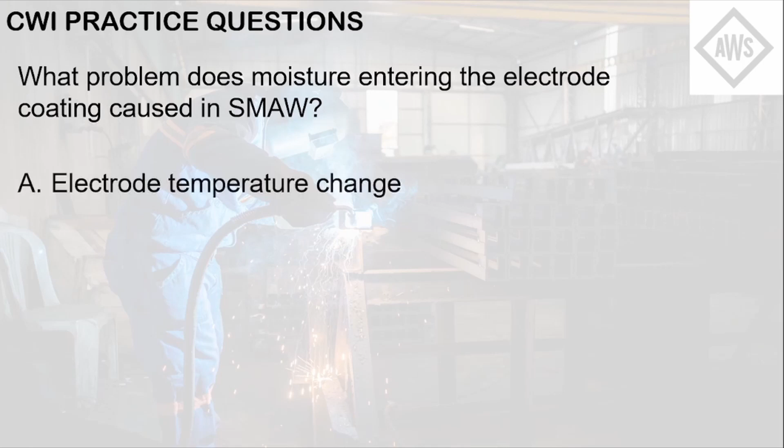Next question. What problem does moisture entering the electrode coating cause in SMAW? Letter A, electrode temperature change. Letter B, short circuits the electrode. Letter C, introduces hydrogen to the weld causing brittleness. Letter D, none of the above.

So when moisture enters the electrode coating, what does it cause during the stick welding process? Does it change the electrode temperature? Does it short circuit the electrode? Short circuiting mainly pertains to GMAW processes. So letter C is the correct answer, because when moisture enters the electrode, basically it's H2O, when it breaks down, hydrogen can cause brittleness to that molten weld pool in the welding process.

So last question. What are the elements of the AWS identification system for SMAW?

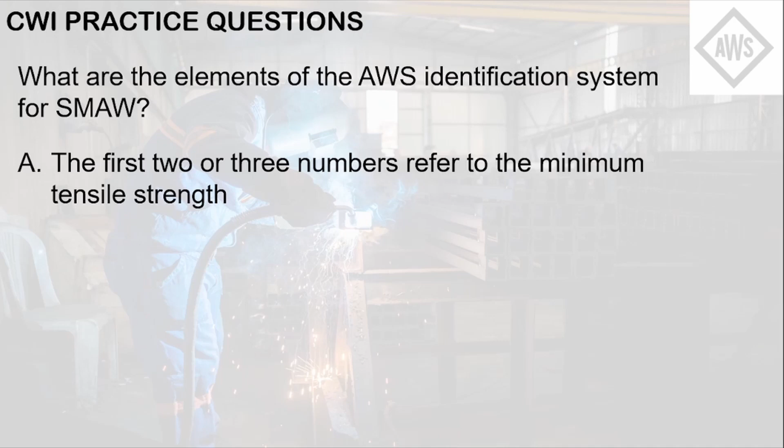Letter A, the first 2 or 3 numbers refers to the minimum tensile strength. Letter B, the next number, second to the last number, refers to the position. Letter C, last number describes other characteristics by the coating present on the electrode. Letter D, all of the above.

So if you check the choices, the first 2 or 3 numbers indeed indicate the minimum tensile strength of the weld. The next number refers to the position, either 1 or 2. The last number is the chemical composition or any other characteristic that describes that electrode. So all of these 3 choices are accurate, so the answer here is letter D.

This welding process is characterized by solid wire electrode which is fed continuously through a welding gun, commonly known as MIG welding. Letter A, FCAW. Letter B, SAW. Letter C, GMAW. Letter D, GTAW.

So FCAW is characterized by a tubular electrode, so definitely that's not the answer. SAW is submerged arc welding, which is an automatic welding process. GTAW is a welding process which consists of a filler metal or a filler rod with a tungsten electrode to heat and weld the metal. So that leaves us the answer, letter C, GMAW.

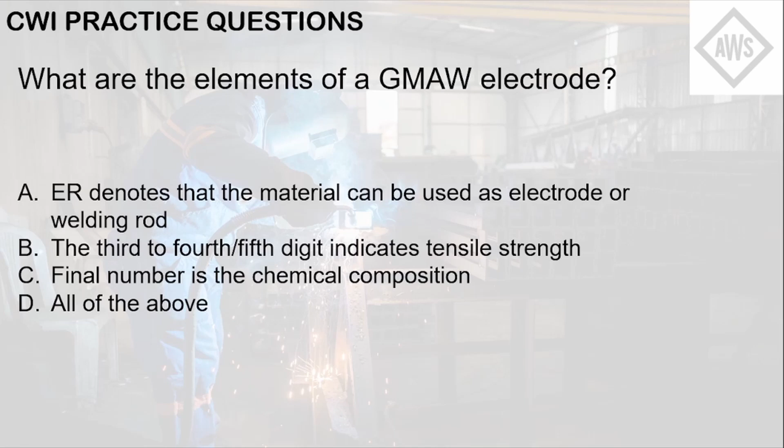All of these characteristics of a GMAW electrode are accurate. The ER denotes that the material can be used as electrode or welding rod. The next digits indicate tensile strength, so 70 or 100 indicates 70 KSI or 100 KSI respectively. And the final number, similar to the SMAW electrode, is the chemical composition of that GMAW electrode. So the answer here is letter D. All of the choices are accurate in terms of the elements of a GMAW electrode.

So normally the naming of electrodes, the electrode designations, are common in the CWI exam. So you have to be familiar with those questions and with the naming of these electrodes.

This process is similar to GMAW except that the electrode is tubular and contains a granular flux instead of a solid wire. It's similar to GMAW because the wire is continuously fed to the welding gun as well, except here the electrode is tubular, not a solid wire as in the case of GMAW. Letter A, FCAW. Letter B, GMAW. Letter C, GTAW. Letter D, SMAW.

So you can immediately cancel out GMAW here. GTAW is gas tungsten arc welding, so it's not the correct answer because it consists of a tungsten electrode with a filler rod. SMAW is not a continuously feeding electrode process, so that's not the correct answer. So the answer here is FCAW. FCAW is characterized by a tubular electrode that is continuously fed to a welding gun, similar to GMAW.

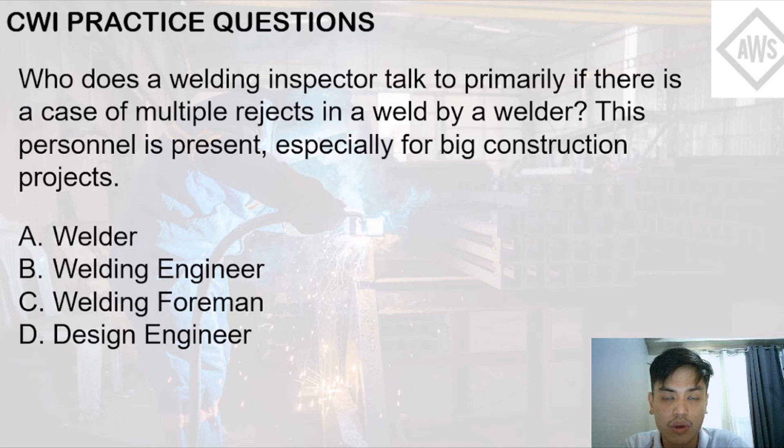So letter D, the design engineer. The design engineer is responsible for creating the specification or the drawing that needs to be implemented during construction, or the one that is referenced by the welder in welding the structures or the components to build it. So the answer here is the welding foreman. The foreman can communicate directly with the welder about the defects without a confrontation.

So next question is, this is known to be the best quality for a welding inspector. A, maintenance of inspection records. B, good physical condition. C, professional attitude. D, experience. So basically, all of these qualities of a welding inspector are good. So what is the best amongst all of them? So letter A, maintenance of inspection records.

Basically, some proponents or owners of the plant, for example, need the inspection records for reference in the future. So if a similar defect occurs in the plant, they may refer to that inspection record. So it is important for the welding inspector to maintain those inspection records in good condition, so they can be referenced in the future for similar conditions.

Good physical condition. Basically, the welding inspector needs to be in good physical condition to go to tight areas, confined spaces, hard to reach areas, or areas at high elevation. So he needs to be in good condition for that. C, professional attitude. This is the quality of a welding inspector to provide unbiased opinions, make his decisions based on facts, and to continuously learn throughout his tenure as a welding inspector.

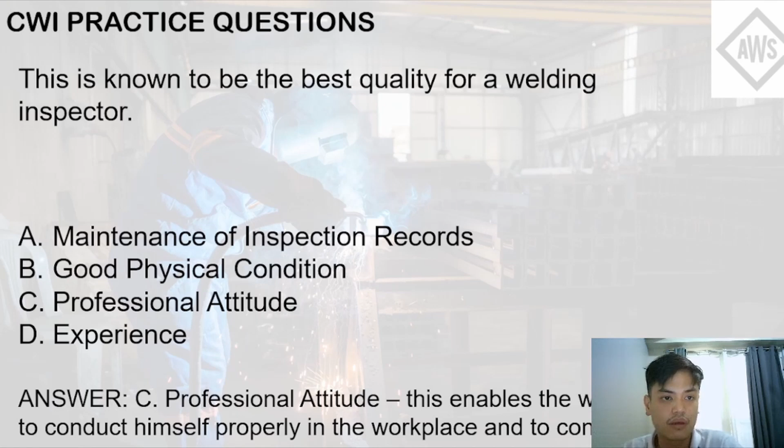By the way, you can pause the video at any time if you need to think of the answers prior to me explaining the rationale of each of the choices. So you can do that.

So what do you call a body of law which, if used in a job specification or contract, can be exerted with the full legal authority of the law? A, code. B, standard. C, specification. D, all of the above.

So basically, a standard is a reference document in which the specification of an equipment, or in this case a weld, is compared to see if it complies with the acceptance criteria. The specification is just a list of parameters. Not to go on a tangent, but the welding procedure specification is the best example for a specification because it lists the needed specs for the weld. For example, the electrical current, the base metal, the filler metal, and the technique for the welding as well.

So the answer here is A, code. For example, if AWS D1.1, which is a code for structural welding of structural steel, is called upon in the contract or job specification, if accidents happen or lapses are made during construction of that project or that maintenance activity, and it is found that there is non-compliance with the code, the engineer on record or the ones responsible for it may be subpoenaed in a court of law to be questioned regarding his compliance or lack thereof with regards to the code that's supposed to be used in that contract.

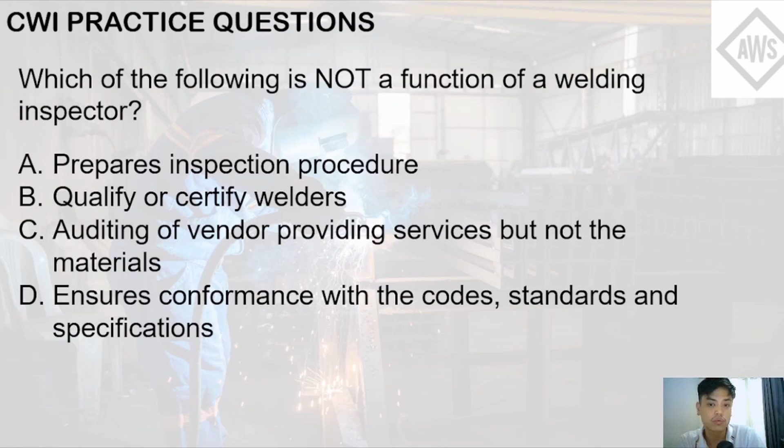So letter D, ensures conformance with the codes and standards and specifications. So this is part of the basic function of a welding inspector. He needs to ensure that the weld quality, the base metals, and other aspects of the welding activity are in conformance with the codes, standards, and applicable specifications. So the answer here is letter C.

So the welding inspector needs to also check the material specification that will be used in welding. Basically the base metal, not just the filler metals and the weld quality itself. It needs to be a holistic approach. Yeah, the inspector is also responsible for the quality of the base metal, as this can lead to failure if not checked. So if you check the weld but you didn't check the base metal, it will result in a failure eventually.

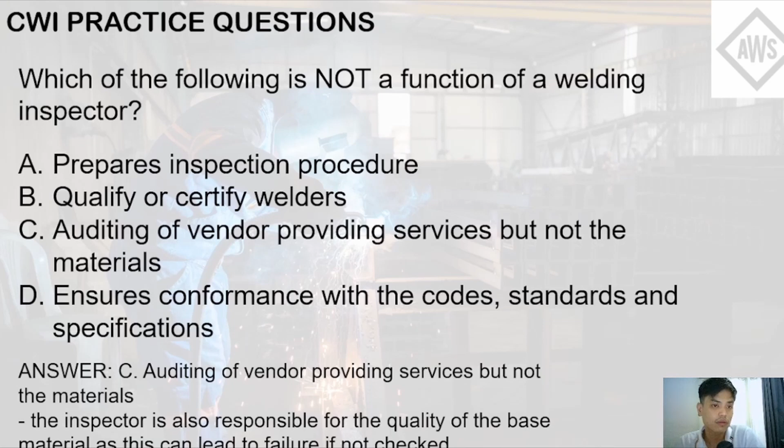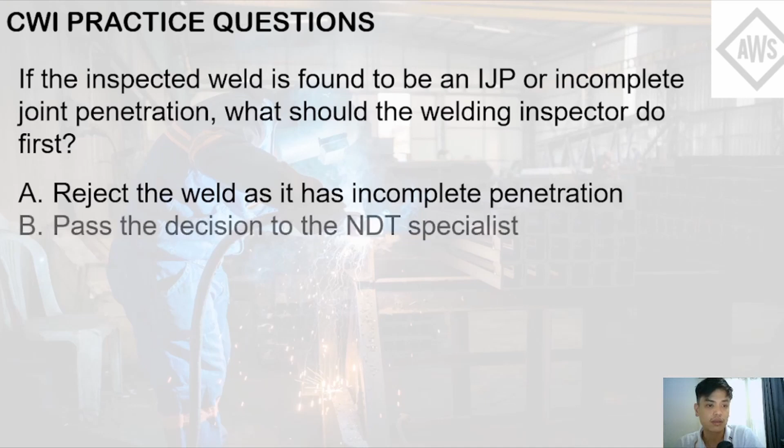Next question. If the inspected weld is found to be an IJP or incomplete joint penetration, what should the welding inspector do first? So this is basically a situational question. A, reject the weld as it has incomplete penetration. B, pass the decision to the NDT specialist. C, clarify the drawing and consult with the design engineer. D, ask the welder to completely fill the weld joint. So basically, this is part of the communication that the welding inspector needs to conduct during his day-to-day activity.

Basically, here is letter A. It states that you need to reject the weld as it has incomplete penetration. So basically, if some welding procedure or some specification or drawings may not accept incomplete penetration, that can be an answer. Letter B, pass the decision to the NDT specialist. So not quite. The choice here is vague.

So you may not need to pass the decision to an NDT specialist here. It need not be specific to a non-destructive testing specialist. It's just incomplete joint penetration. You can see the discontinuity or the defect just by looking at it. So the NDT specialist may not be the one that needs to be consulted immediately.

So letter C, clarify the drawing and consult with the design engineer. Some specification or drawing specifies if the structure or the components to be welded are just incomplete joint penetration. So it may be acceptable for some drawing or design documents. So you may need to consult your design engineer for this one. D, ask the welder to completely fill the joint.

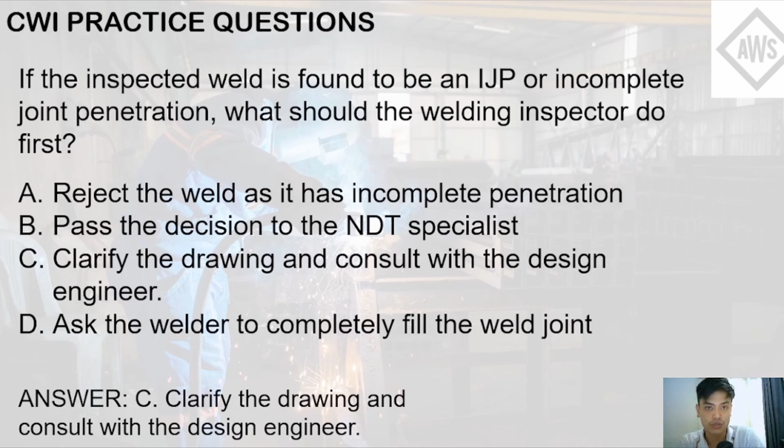So from my point earlier, you need to consult the designer of the structure or the components if it is indeed an incomplete joint penetration. So the answer here is clarify first the drawing and consult with the design engineer. You need to be in consultation first with the appropriate personnel that designed the joints or structures.

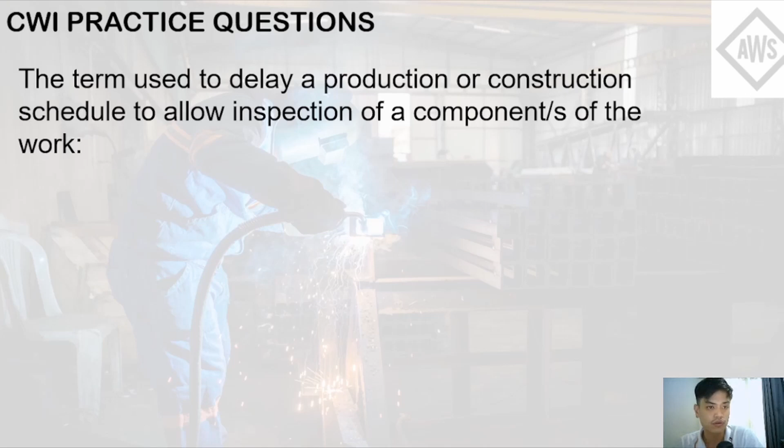Next question. The term used to delay a production or construction schedule to allow inspection of a component or components of the work. This term is indicated in the inspection test plan. A, pre-construction, B, inspection point, C, witness, D, hold point. So letter A doesn't make any sense. Pre-construction doesn't align with what the question is asking for. Inspection point is a more general term. Witness is one of the points indicated in the inspection test plan.

D, hold point. Basically, this is the answer. It delays the production or construction schedule to allow inspection of a component. So what's the impact of a hold point? If the inspection did not yield a positive outcome, the succeeding work activities related to that activity will not be able to start unless the test yields a positive result.

For example, the welding inspector may need to inspect first the weld joint preparation done by the fitters or the welder before proceeding with the root pass, the hot pass, etc. So he may indicate in the inspection procedure or the test plan that the inspection for the joint preparation is a hold point. Thus, if he finds it unsatisfactory, the welder needs to rectify the joint preparation to the acceptance criteria so as to proceed with the succeeding activity, basically to weld the joint.

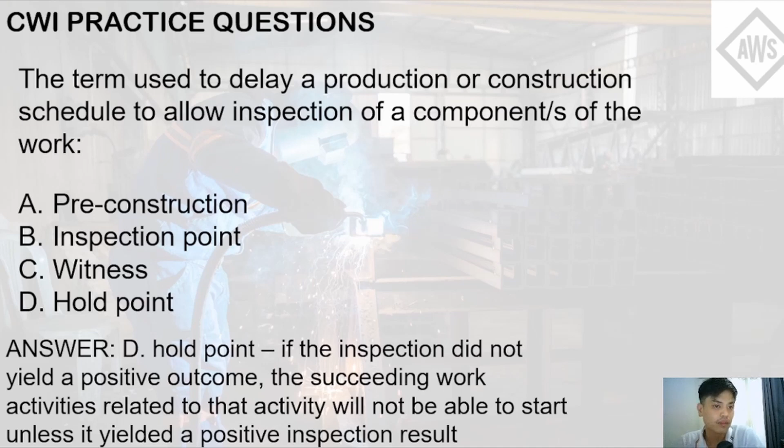Next question. Which of the following is not a good practice for maintaining an inspection record? Signing the inspection record; indicate the job name, location, and specific test information; ink or typewritten. Basically, the inspection record needs to be in ink or typewritten by a computer. The errors are single lined out.

So letter A, the welding inspector or the one that created the inspection record needs to sign the inspection record. So he needs to be accountable for it, basically, by signing his name. Indicates the job name, location, and specific test information. So it is essential that the inspection record has a corresponding job activity where the location may be.

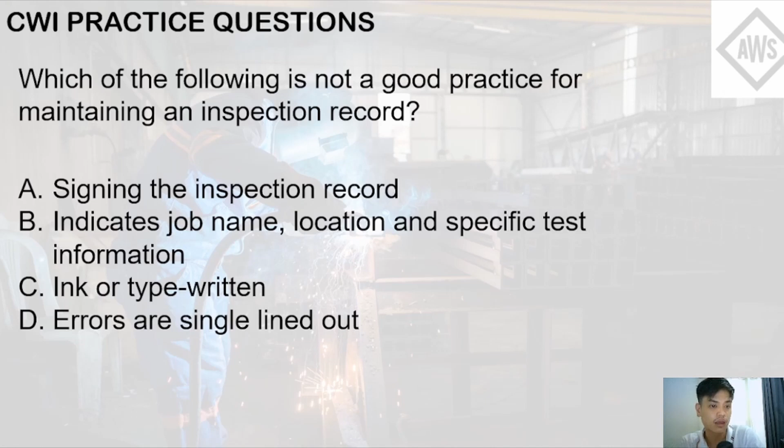For example, if it is a plant, the specific location where the activity is conducted in that plant, in the production area, for example, and the specifics of the testing that is done. So what is the acceptance criteria, what tests, procedures are done, etc. And it needs to be in ink or typewritten. Errors must be single lined out, and what is missing in this choice, it needs to be initialed.

So if errors are made during the remarks or indication of remarks in the inspection records, it must be single lined out and initialed by the one who did it. Basically, it is the welding inspector that made those remarks. So if he has errors on it, he needs to initial them as well.

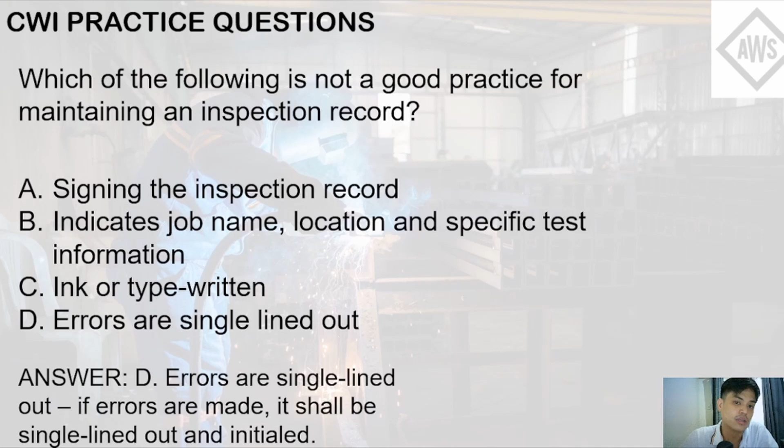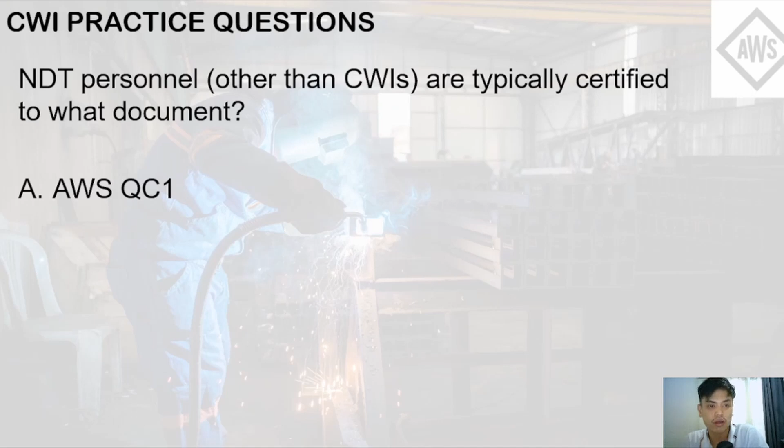Last question. So NDT personnel other than CWIs are typically certified to what document? Letter A, AWS QC1, B, AWS D1.1, C, API 1104, D, ASNT SNT-TC-1A. So the answer here is letter D, ASNT, which stands for American Society for Nondestructive Testing. Basically, this certifying body provides certification for NDT professionals.

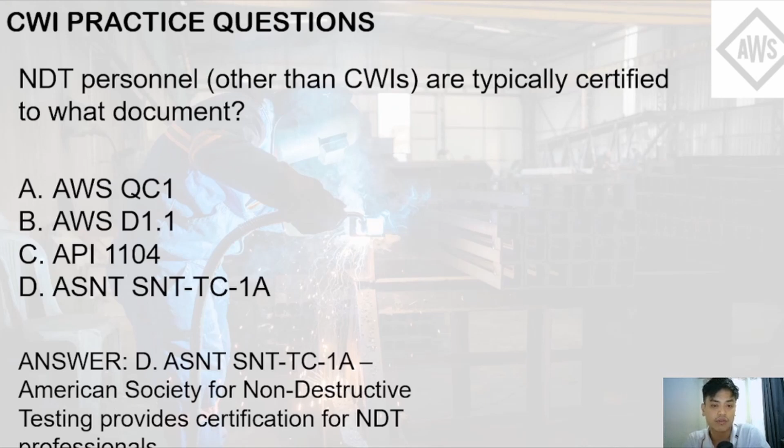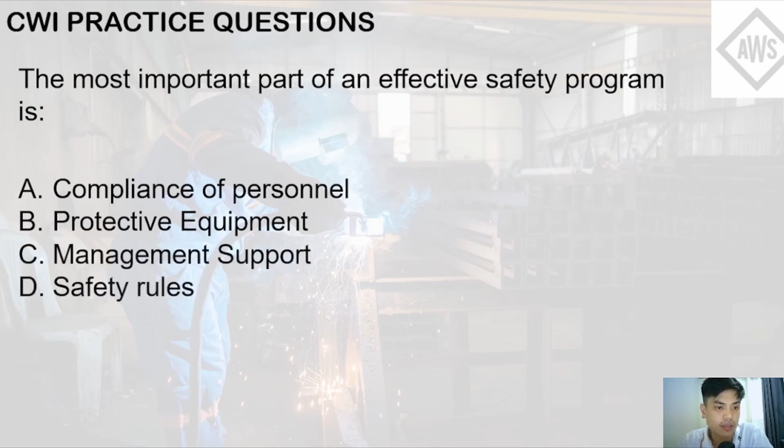The most important part of an effective safety program is: A, compliance of personnel, B, protective equipment, C, management support, D, safety rules. So in order for a safety program to be effective, what do we need basically? What is the most important aspect of it? So letter A, compliance of personnel. Compliance of personnel is needed for an effective safety program, but it's just one piece of the puzzle, and it's not the most important part.

Protective equipment is also important, but if you remember the hierarchy of a safety program, the first one is elimination of hazards, substitution, engineering and administrative controls, and the last one is PPE, right? Because it is the last line of protection for the personnel against any hazards. So it is important, but it is in the last part of that hierarchy.

Letter C, management support. So like any other programs, maybe safety, quality, etc., management support is important for everyone's buy-in and compliance for an effective safety program. Safety rules is basically what entails that safety program. So the rules and regulations and what consists of the program itself.

So the answer here is letter C, management support. Like any organizational program, management support is needed for everyone's buy-in and compliance with the safety program. It needs to start from the top basically.

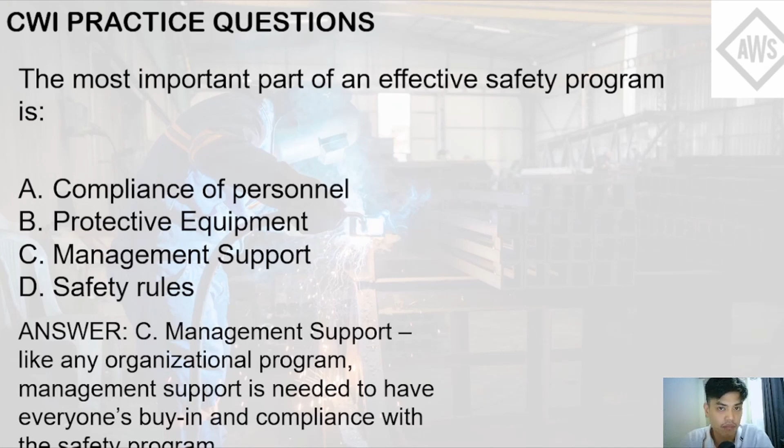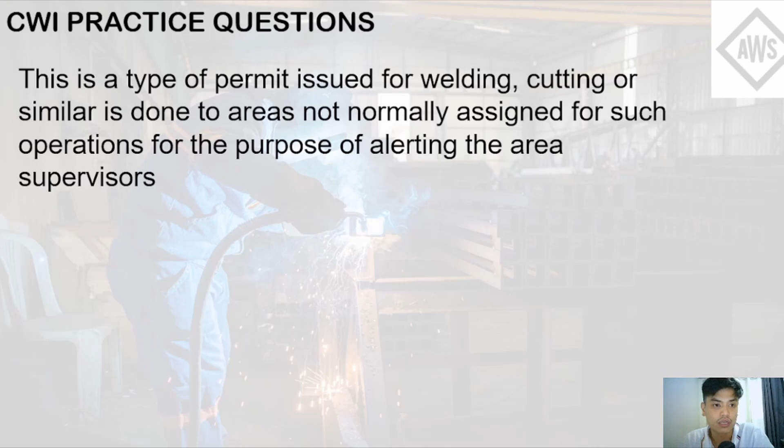Next question. This is a type of permit used when welding, cutting, or similar activity is done in areas not normally assigned for such operations, for the purpose of alerting the area supervisors. Letter A, cold work permit, B, hot work permit, C, vessel entry permit, D, no permit is needed. So the first choice, cold work permit, is just for a work activity that doesn't produce sparks or doesn't generate any heat.

So that's cold work. Hot work is for welding, cutting that uses oxyacetylene, for example. Basically the one that generates fumes or heat for that activity. For refineries, for plants that are normally not designed for any welding or hot work activity, a hot work permit is needed to alert the area supervisor of any activities that will generate heat, that will be a hazard to the plant because it might ignite the fumes.

For example, in an oil and gas refinery or a petrochemical plant that normally generates fumes, this hot spatter or generated heat might ignite those, basically creating fire. A vessel entry permit is used for confined spaces that need to be validated first for oxygen level before any activity is commenced.

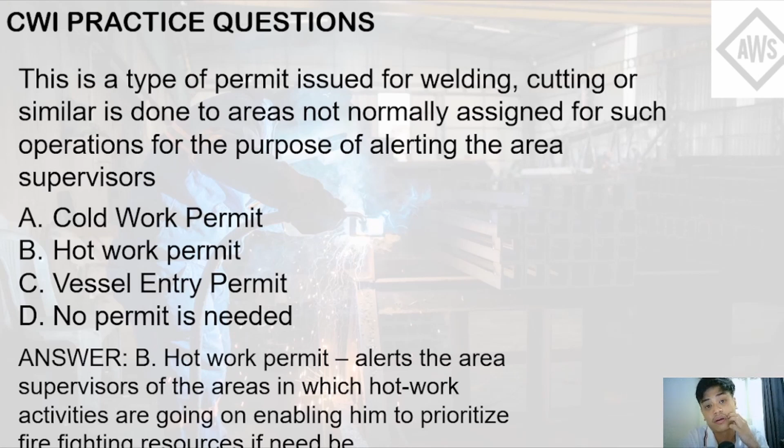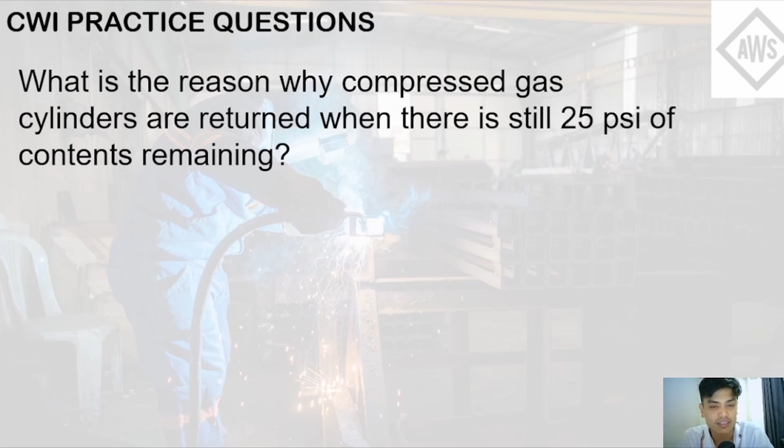Next question. What is the reason why compressed gas cylinders are returned when there is still 25 psi of contents remaining? This is a practice of handling compressed gas cylinders. Why is there a need to return it when there's still 25 psi? Is it not wasteful to return it when you know it has contents? So what is the reason behind this?

A, because the trained personnel is used to filling contents without remaining pressure inside the cylinder. B, to prevent atmospheric contamination of the cylinder. C, to avoid explosion or combustion of the cylinder. D, none of the above. Letter A is true; it's used to filling contents without remaining pressure. But the question here is, what is the reason behind it?

Letter B, to prevent atmospheric contamination of the cylinder. This is a good answer because if you have pressure contained in that cylinder, atmospheric gases will not be able to enter, because the pressure of the atmosphere is 14.7 psi. So it will not be able to contaminate the contents. Letter C, to avoid explosion or combustion. For the cylinder to explode, it needs a source of heat, and in this example there is none.

Letter D, none of the above. So the answer here is letter B, to prevent atmospheric contamination of the cylinder. The remaining pressure will serve as a seal, preventing atmospheric gases from entering the cylinder.

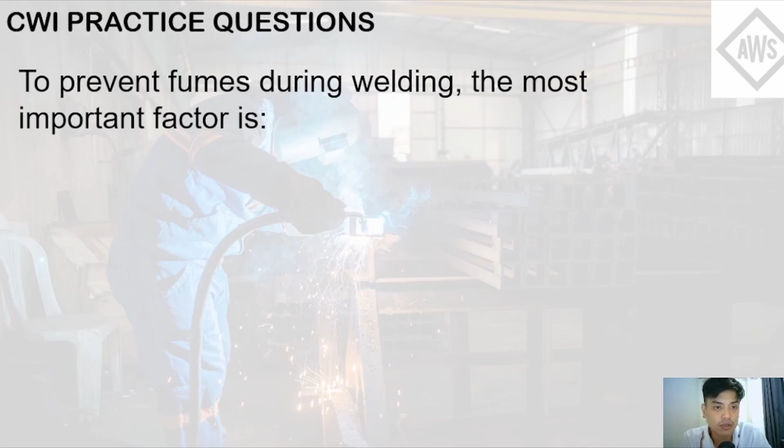The last question for this set: to prevent fumes during welding, the most important factor is A, the type of base metal, B, the type of welding process, C, the type of filler metal, D, the position of the welder's head. The most important factor is the one that you can control. Letter A, the type of base metal. Different base metals have different production of fumes.

Letter B, the type of welding process. It differs because of the different filler metals used, different base metals, the flux used for that specific filler metal, and the duty cycle used in the welding machine. So it differs depending upon the welding process. Letter C, the type of filler metal. As I've mentioned, it depends on the composition of that filler metal. Letter D, the position of the welder's head.

Now this is the most important factor to prevent fumes, as for example, during the design of the welder's helmet, the ANSI standard for safety in welding has a clause wherein you need to conduct samples for the design of the welding helmet near the breathing zone of the welder's head. So that's how important the position of the welder's head is. You need to sample that breathing zone to have a baseline for designing the welder's helmet.

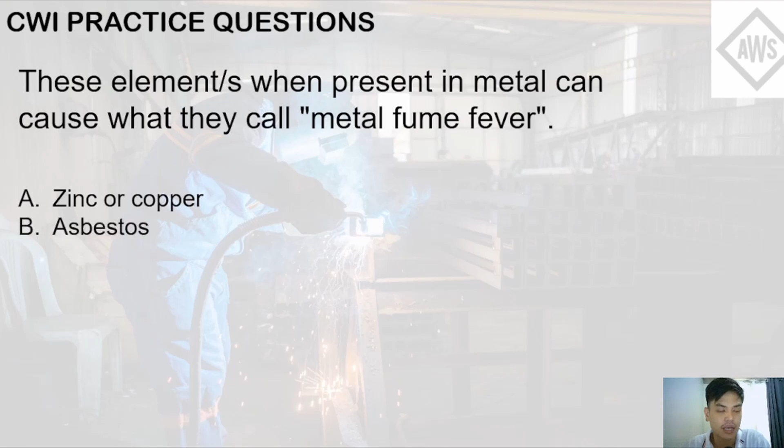This element or elements, when present in metal, can cause what they call metal fume fever. A, zinc or copper. B, asbestos. C, fluorine. D, none of the above. So letter B, asbestos, is now known to be a cancerous or very harmful substance. Before you use it in any type of project, maintenance activity, repair or rehab, you need to consult with the local authority for the use of asbestos.

Letter C, fluorine, is one of the elements or compounds used in the coating of the electrode. So the answer here is letter A. Zinc or copper normally produces fumes that can cause nausea or what they call metal fume fever.

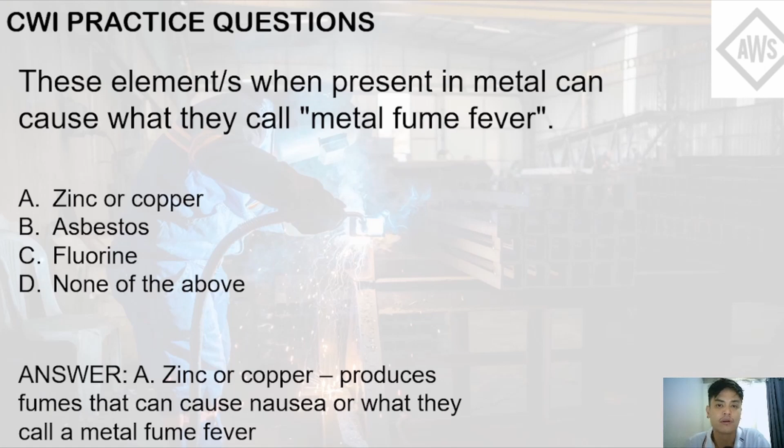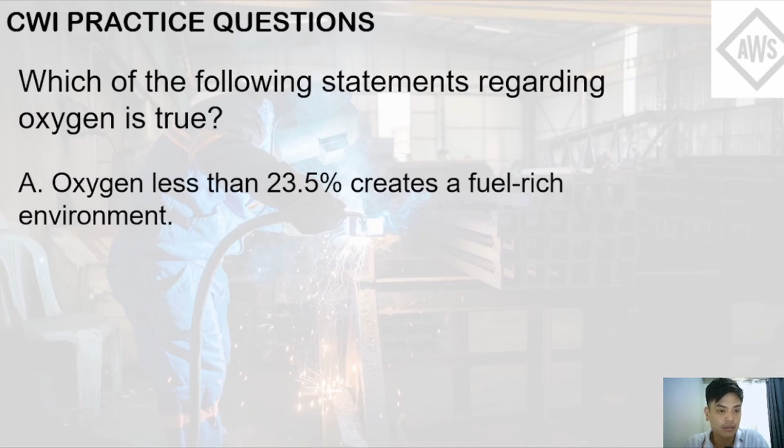Next question. Which of the following statements regarding oxygen is true? Letter A, oxygen less than 23.5% creates a fuel-rich environment. Letter B, oxygen is non-flammable but supports combustion. Letter C, oxygen below 19.5% can still support life. Letter D, both A and C. So the CWI exam has these types of questions. The last choice will have you choose between two answers.

So let's explain each. Letter A, oxygen less than 23.5% creates a fuel-rich environment. Actually, if it is above 23.5%, it will create a fuel-rich environment. This is especially important for confined spaces, wherein before the welding activity commences, the safety personnel needs to check via a gas detector or other instrument that the confined space will not exceed the 23.5% threshold for creating a fuel-rich environment. So letter A is not correct.

Letter B, oxygen is non-flammable but supports combustion. Yeah, this is a good answer. Oxygen is not flammable by itself, but if you remember the fire triangle, oxygen is one of the components needed to support combustion. Letter C, oxygen below 19.5% can still support life. Actually, 19.5% is the threshold. If you go below that, the oxygen level for that confined space or any area will not be able to support life. So the answer here is letter B. Oxygen is non-flammable but supports combustion.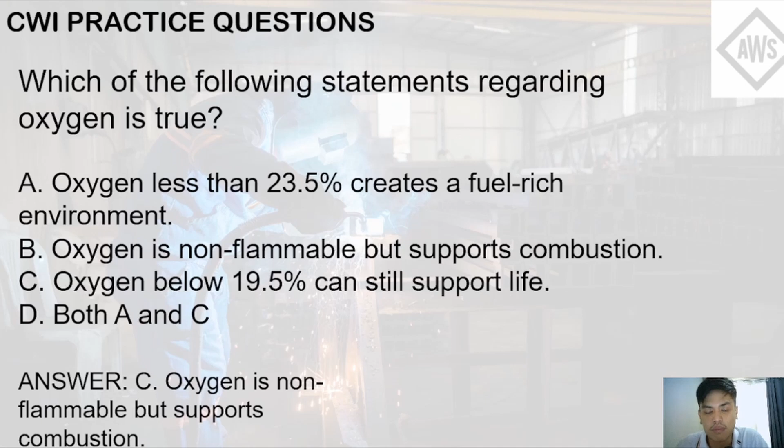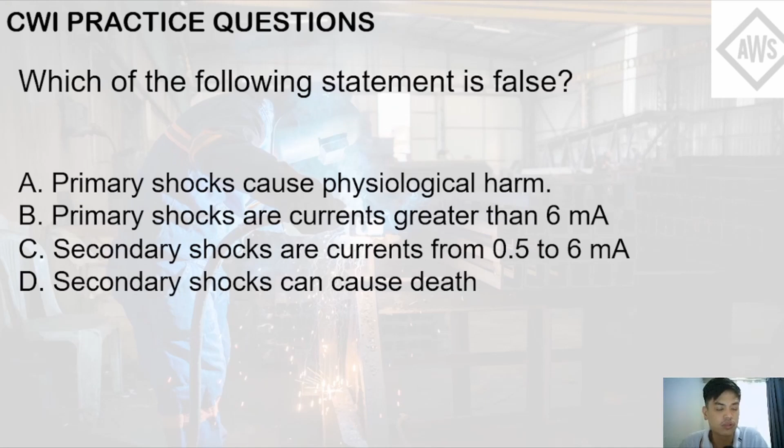Next question. Which of the following statements is false? Letter A, primary shocks cause physiological harm. This question is regarding electric shock. Letter B, primary shocks are currents greater than 6 milliamperes. C, secondary shocks are currents from 0.5 to 6 milliamperes. Letter D, secondary shocks can cause death. So which statement is false? By the way, you can pause at any time if you want to think of the correct answer. So the answer here is letter D.

So why are the others incorrect? Primary shocks can indeed cause physiological harm, and these shocks are greater than 6 milliamperes, so letter B is also correct. Letter C, secondary shocks are indeed classified from 0.5 to 6 milliamperes. They don't cause physiological harm. They might cause minor tingling or involuntary movements of the muscles, but they will not cause physiological or irreversible harm to the organs of a person exposed to that kind of current.

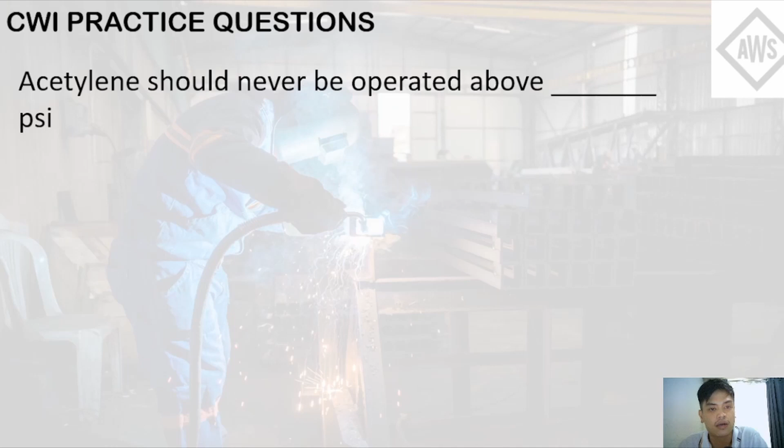Next question. Acetylene should never be operated above blank PSI. So what PSI is that? A, 15. B, 20. C, 25. D, 30. The answer here is letter A. Above 15 PSI, acetylene can become highly unstable and can explode. Acetylene is a highly volatile gas, so if it is pressurized above 15 PSI, it can explode the cylinder and cause accidents. So it should never be operated above 15 PSI. You also need to check the manual of the acetylene cylinder before operating it, just to be sure.

So this is the reason why the workplace must be free of combustible materials, as this hot spatter can kickstart a fire if it is in contact with combustible materials like wood, paper, etc. So if this is not possible, you have to provide fire blankets, fireproof coverings for the possible combustible materials that can be ignited by hot spatter.

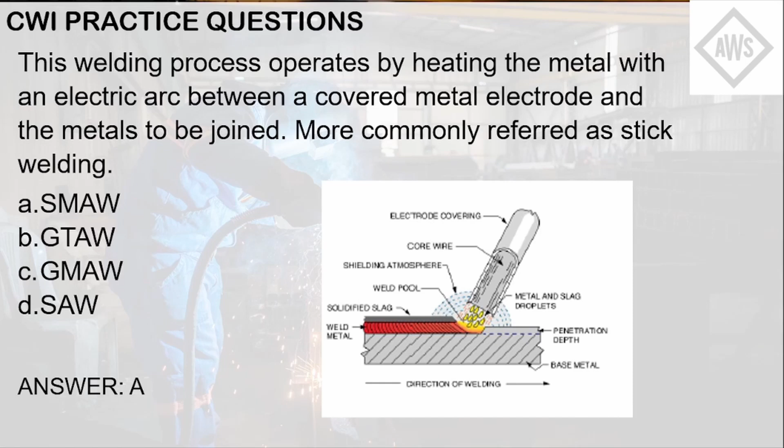So for the choices, deoxidation is the characteristic of the electrode that removes the impurities from the molten metal. Alloying refers to the addition of elements that will improve the mechanical properties of the weld. Insulating is the property of the electrode that produces a solidified slag that will prevent the sudden drop of temperature for the weld, thus preventing embrittlement.

So the answer here is letter A, shielding. It is the characteristic of the electrode coating where it decomposes to form a gaseous shield for the molten metal for the purposes of protecting it from harmful gases that will embrittle the weld or cause unintended weld defects.